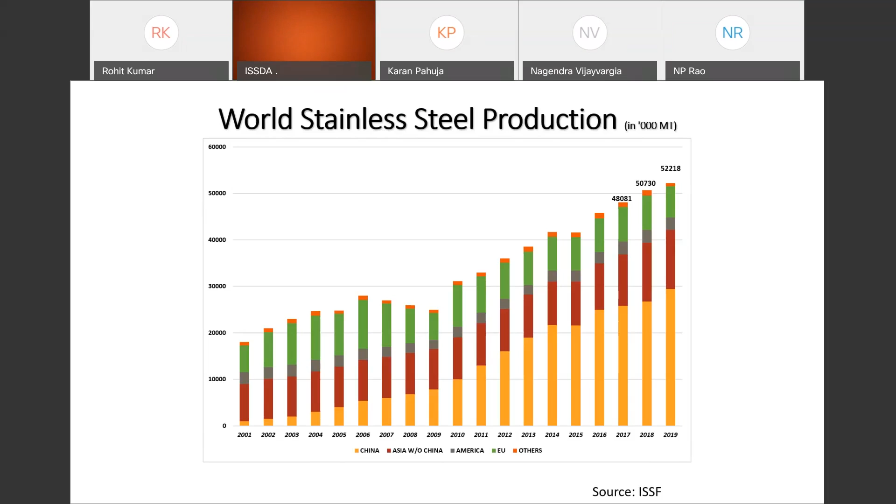Talking about India, yes, we are the second largest producer, touching almost 4 million tons last year. This year, obviously, there will be some downslide in the production of stainless steel, but that is natural because of the pandemic. Per capita consumption is an important indicator of the use of stainless steel in general. 10 years back, we were at 1.2 kg per capita consumption. We have been successful in increasing the per capita consumption.

When I say per capita, there are many sectors where stainless steel is used. Architecture and building construction is one, but in the process industry, like milk production, without stainless steel you cannot even imagine production of milk or any food item, because it is a hygienic, non-contaminating material. There are areas like automotive, railway and transport. All the coaches you see today with Indian Railways are made in stainless steel, a mix of grades. And there are many such areas where stainless steel is used.

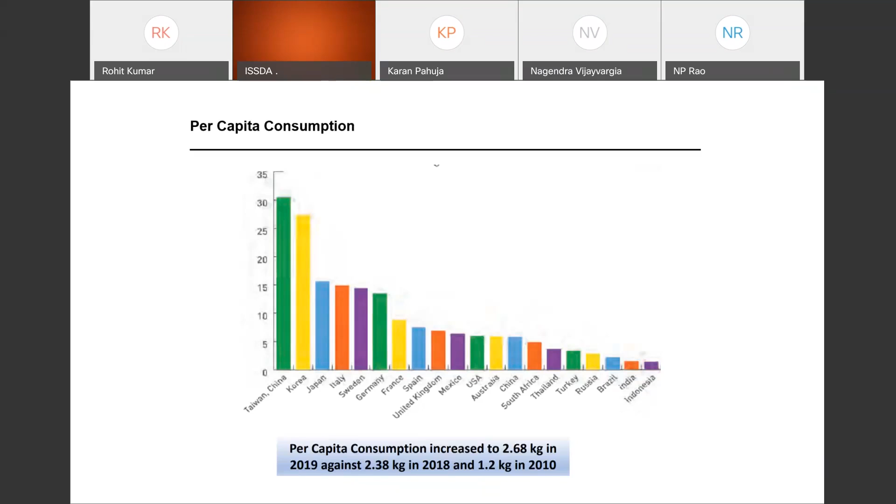But ABC has a large chunk of it, and it is increasing very fast, and today we are standing at a per capita consumption of 2.68 kg. But if you compare it with other countries where the use has been going on for the last 4 or 5 decades, we still have a lot of ground to catch up. And so these webinars are one of the ways we would like to spread the knowledge of stainless steel and why it is an important material for building and construction.

One of the most prime factors, before I come to the properties of stainless steel, is that it's a very green material. These days we are already struggling with environmental issues, and any effort to reduce the carbon footprint should be appreciated. Stainless steel is highly recyclable, and even after very long use, when it comes to recycling, it is recycled completely, and it helps in reducing the carbon footprint.

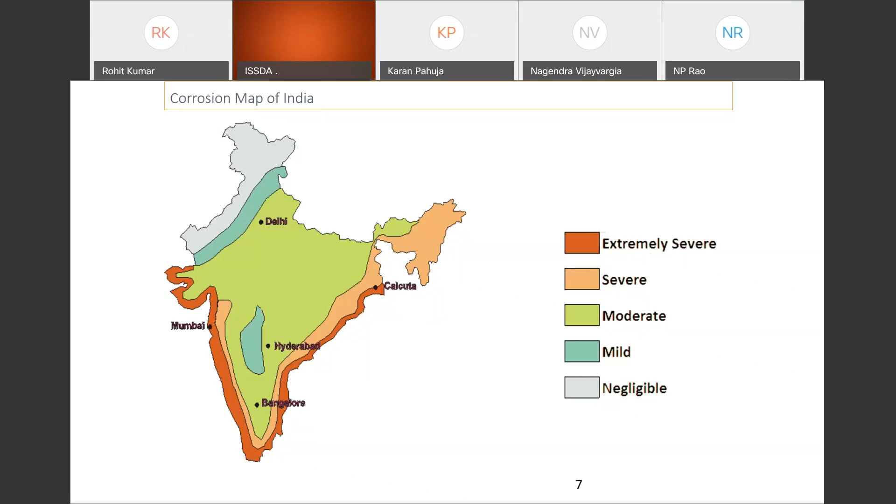Why do we use stainless steel in India? I'll come specifically to India now. In India, we have one of the largest coastlines, and along the coastline there are many cities. Mumbai is one of them. Bangalore also. Chennai is one of them. Kolkata, and there are inland cities like Delhi, Hyderabad, and such cities. There is corrosion due to the sea environment. There is corrosion due to heavy pollutants and pollution, and material degrades.

So what are the materials which are in use? Yes, wood is one of the materials used in building and construction, but wood cannot be used in all kinds of forms, and it is prone to insects, fungus, and degradation. Steel is one of the prominent materials used in construction, but again, steel gets corroded very fast. Concrete is sometimes used in combination with steel reinforcement bars, and there are issues of corrosion and degradation of concrete.

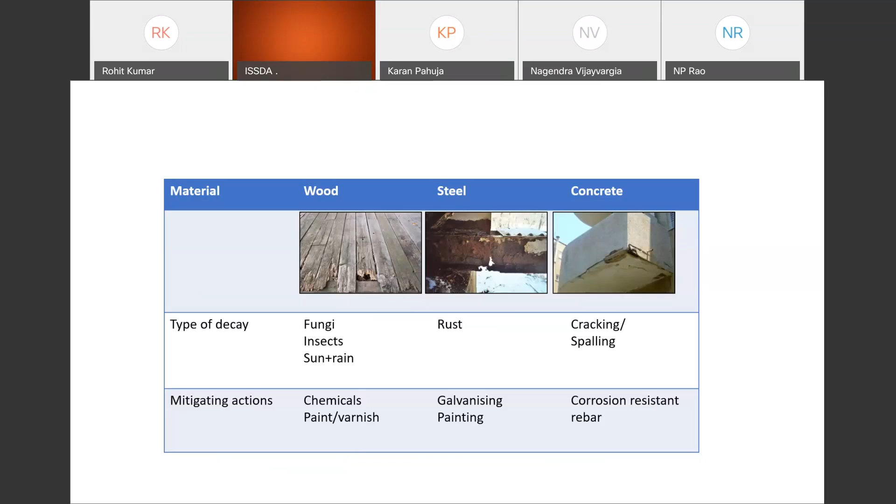These days, plastics are used, but under UV light, it becomes brittle and it also degrades. When I say it also corrodes, it doesn't mean just the corrosion of the top layer, but any degradation of the material is corrosion. So this also corrodes. Copper and aluminium are widely used.

Copper has this tendency to form a green patina over time. Aluminium also has issues of corrosion, as well as issues of strength, and all finishes are not available. Stainless steel, one of the prominent materials being used since its invention in 1913. And just after that, if you look at the small photograph, the Chrysler building, the first cladding of stainless steel in this building was done long back, and it is still shining and bright. So stainless steel has a prominent role in building and construction.

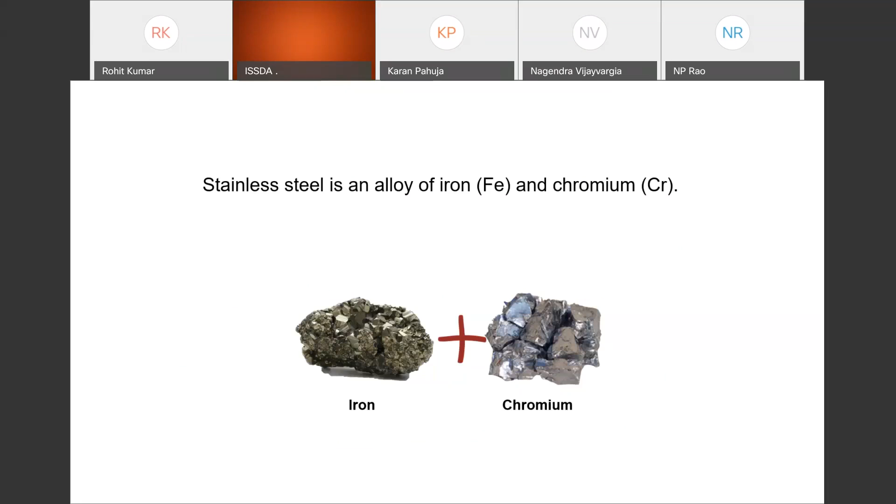But for some of the audience who are new to stainless steel, I'll quickly in 2-3 slides talk about what is stainless steel. Stainless steel is generally understood to be an alloy of chromium, nickel, molybdenum, and other materials. But to make basic stainless steel, you have to just add chromium into iron.

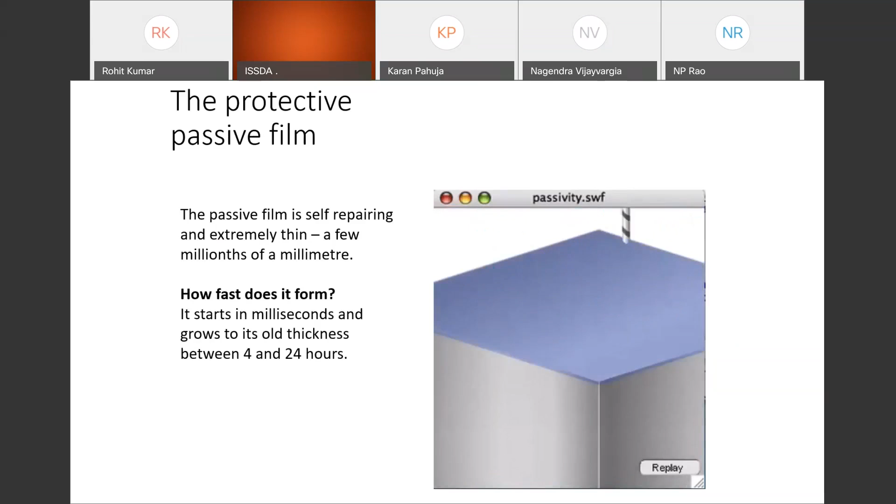So this is a very thin passive layer, and it keeps forming, and that is the reason stainless steel doesn't corrode easily. When we say stainless steel, please understand we are saying stainless, we are not saying stain free. There are many grades of stainless steel, and there are issues of selecting the right surface finish. We will take up all these matters today to understand why a good grade, good surface finish, and other properties of stainless steel should be selected carefully for a particular application.

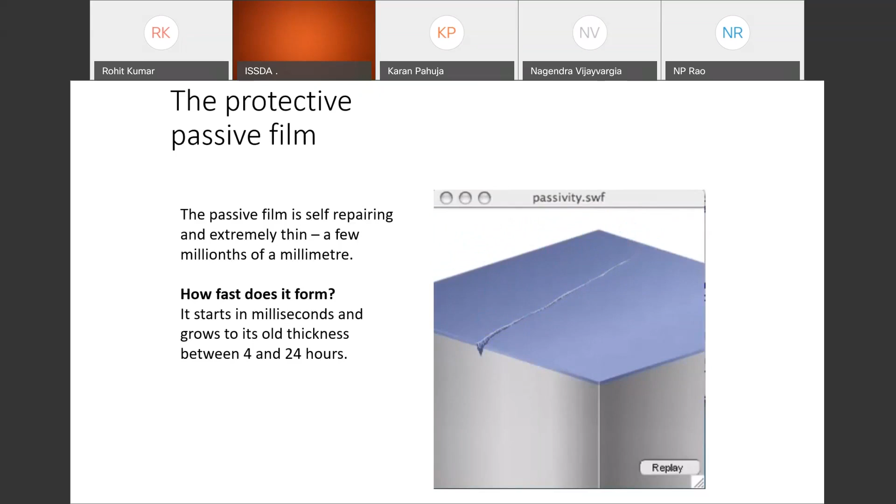So basically, stainless steel does not rust easily, and coming back to the alloying elements, chromium is the reason for stainless steel becoming stainless steel. Now, when you use a material, you should have the ability to bend it, cut it, and join it very easily. When I say joining, I mean welding. So to improve the ductility, toughness, and weldability, you add a certain amount of nickel into it.

Now, where the corrosion resistance requirement is high, where salts are present, and you need better pitting corrosion resistance, molybdenum is added into stainless steel. Nitrogen: with the advent of argon oxygen decarburization technology in the 90s, the ability to put nitrogen into the melt was introduced, which is an austenitic stainless steel stabilizer. It also improves pitting resistance a little bit, and definitely increases strength. So nitrogen bearing stainless steels were also introduced. So these are some of the major alloying elements.

Apart from that, other elements like titanium, niobium, and others which improve some of the welding or malleability properties are also added. But for architecture, building, and construction, we will restrict to the grades and families most widely used in building and construction. Now, you must have heard many names of stainless steel like 304, 202, 2205, 430, and all. To understand them, I have divided them into four basic categories.

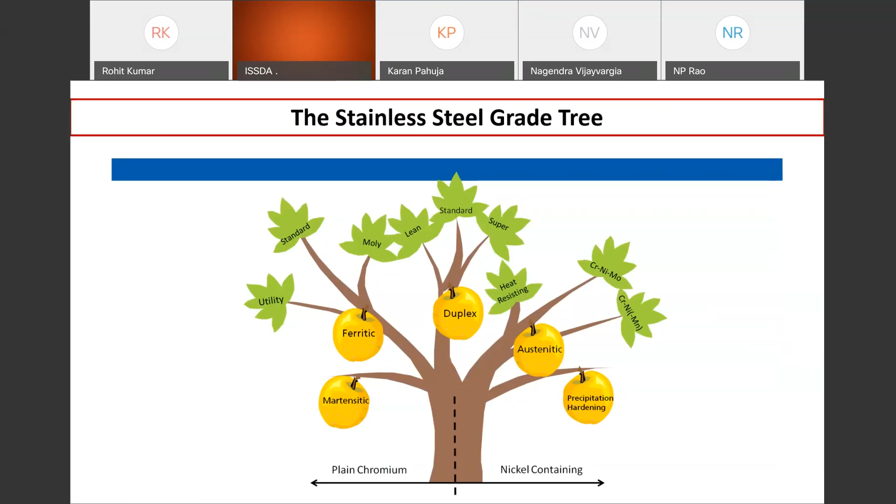Coming to the attributes of stainless steel, why do you want to use stainless steel? You are all aware that it has excellent corrosion resistance. But apart from corrosion resistance, in building and construction you need a very good strength material, where the strength to weight ratio should be very good. It should be easy to clean. It should be self-cleaning, as well as cleaning should be easy. Considering a handrail, where you touch it all the time, it should be hygienic also.

It should have good energy absorbing characteristics, good high temperature resistance, be recyclable, and it should be available in a wide range of finishes. I'll come to all these properties and try to link them with the application.

But apart from these properties, there are certain other requirements also, like the requirement of accidental blast, or in terms of architecture and building construction, tsunami, drought, landslide, high wind speed, tornado, hurricanes, even earthquake. These days we are encountering earthquakes every day in our Delhi capital region. Fire, a very important factor, maybe terrorism or some vandalism. So these unwanted factors also come into the picture while doing material selection.

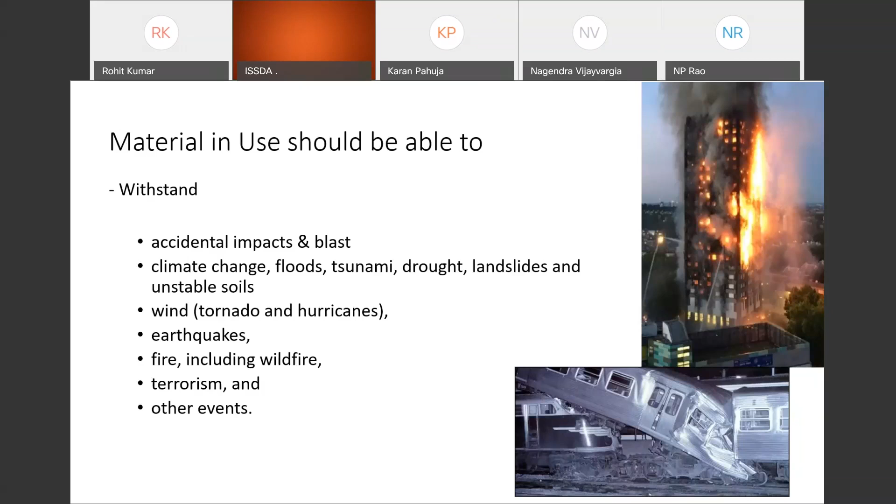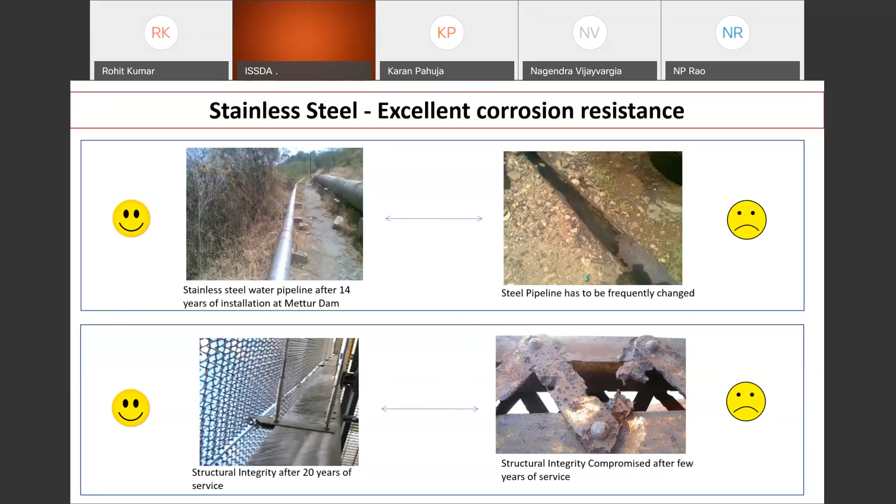There are high strength grades such as duplex 2101, 2205, 2304. So there is a range of grades available to select for a particular application. So it is important to understand the properties and application of the grades.

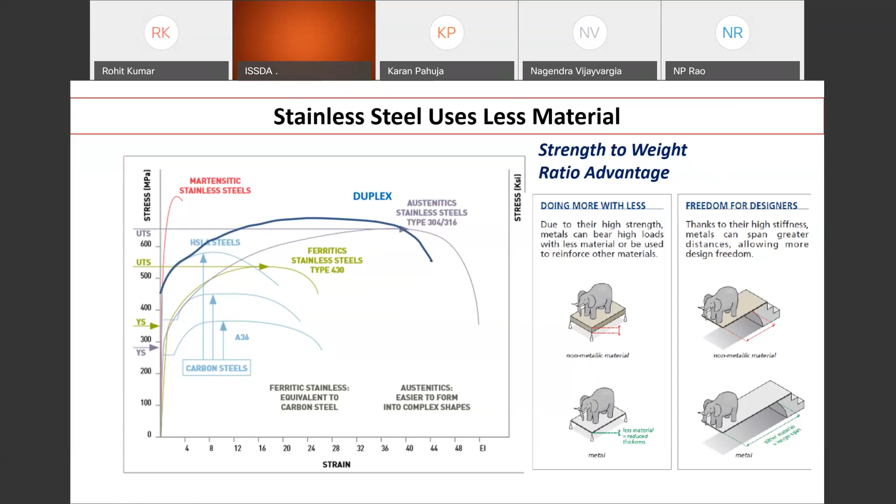Similarly for the cantilever beam. If you want to keep the same thickness, then if you have a high strength stainless steel compared to other material, you can have a longer platform. So the idea is that if you are going to use stainless steel as a high strength material, you will always be able to save material in design, as well as create more opportunities for the designer to work with.

Some of the examples, like this Parliament Building Library dome, which was very long back, was made in stainless steel structures. It takes less space, it looks good, it has good combination with wood, glass, or any other material. Similarly, not very late, the Afghanistan Parliament was done by the Indian government. CPWD was involved, and they used duplex stainless steel tubular sections for their central dome, not only for the lighter structure, but also if there is any vandalism or terrorism, it can withstand some of the loads.

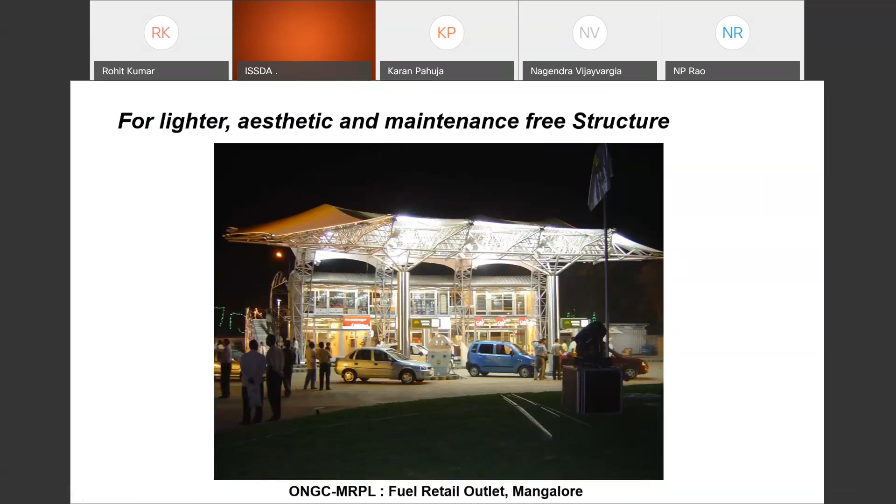So higher strength lighter structures are possible using stainless steel, good cantilevers, smart handrails, because you have high strength material. You don't need much of the load supporting elements, small load support, and it withstands the load. One petrol pump, this is again a very old picture, for lighter aesthetic and maintenance free structure. If you go with stainless steel, it gives you value. Though I'll come to the initial cost and life cycle cost of it later, because many of you must have this question in your mind whether it is very costly or not.

Now, another factor is impact strength. Earlier all the coaches used to be carbon steel ICF design, which was in a way not very good at having good impact strength. When you are using stainless steel, you had this ability to have a good impact strength. Now, I'm showing this picture because I want to take you to the next picture where this impact resistance property of stainless steel can be used.

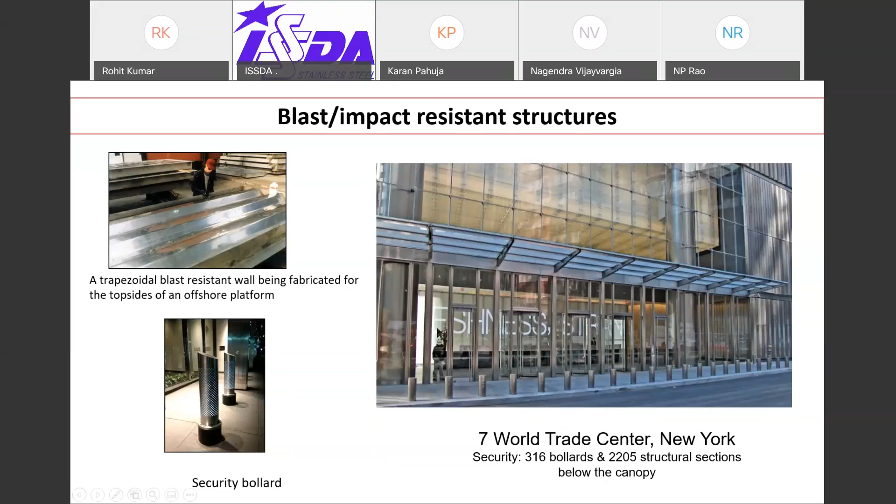So if you cold work and make some of the stainless steel in trapezoidal section, then it increases the impact strength. One very common example is bollards, used not only for aesthetic purpose, but so that they can withstand some of the hits they can get from vehicles or terrorism. This very beautiful example is from 7 World Trade Center. After 9/11, some of the buildings had to be protected from terrorism. So they chose stainless steel because it is very high strength, and the look of the building is still maintained. Instead of using a very thick section of other material, stainless steel is used to get it done.

So we have been telling the airport authority that all over the world, most of the airports which are prone to hurricanes and tornadoes are built in stainless steel, because stainless steel does not corrode. Not only the wind pressure on sheets, but at the joints where it is connected with the steel bolts, corrosion happens and it gets loosened up, and results in some kind of tearing and breaking. So stainless steel roofs are popular. So we should also be realizing the importance of it and start using it.

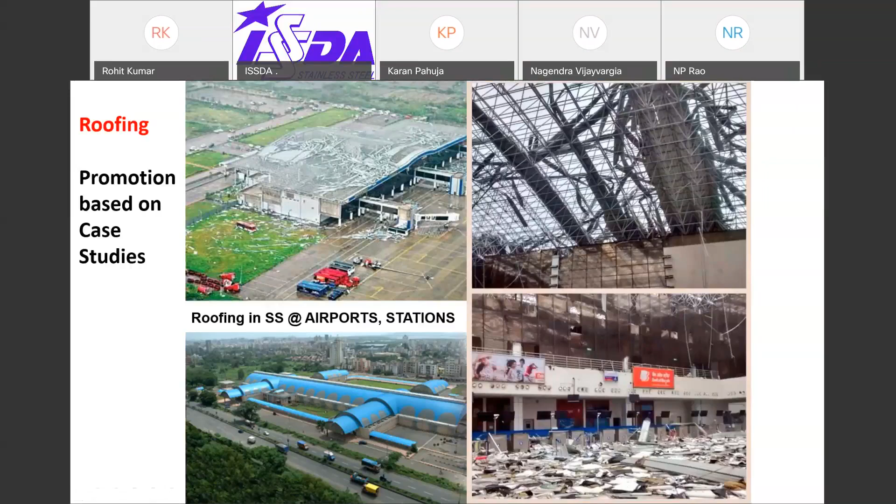What this property suggests is that in case of fire, if structural stainless steel is used, you will have more time to evacuate the building. Like say for the World Trade Tower collapse, if it would have been stainless steel, you would have much more time before the structure loses its strength and collapses.

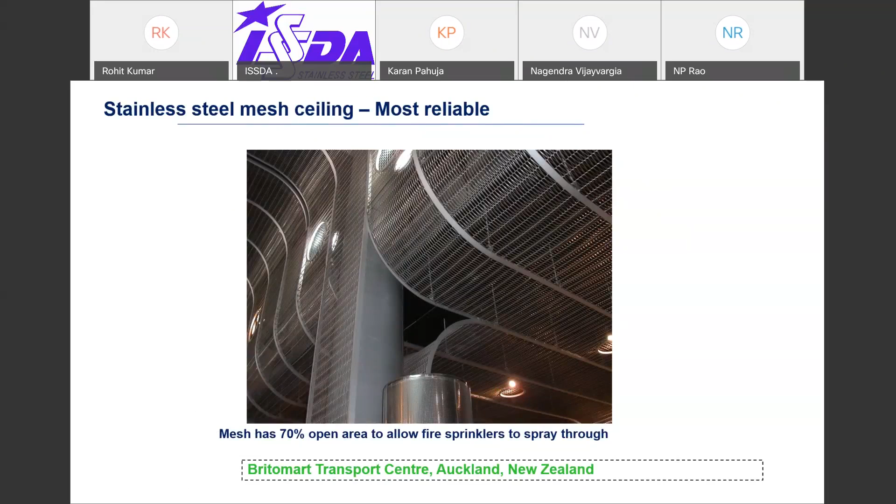So these properties are very important when considering stainless steel, not only here but also for the paneling of the building. When you do building facades, I'll come to that point also, these fire properties also help. Similarly, there are wire meshes available for mesh ceiling on the top. Earlier it used to be asbestos, which is now banned. Now there are materials which are supposed to be fire retardant, but unfortunately not all materials are fire retardant. So stainless steel used for mesh application is one of the ideas I would like to throw in front of you for building and construction.

This question must have come to your mind also, that if you use a stainless steel roof, it will heat more and accumulate more heat beneath the roof. No, it is not the case. There is something called solar reflective index, and stainless steel is more efficient in reflecting solar energy than typical roofing cladding material if the surface finish is selected in a certain way. Stainless steel with a certain surface finish will reflect more compared to white paint and asphalt. This is an experimented, documented fact. With a proper selection of stainless steel, you will have a cooler roof.

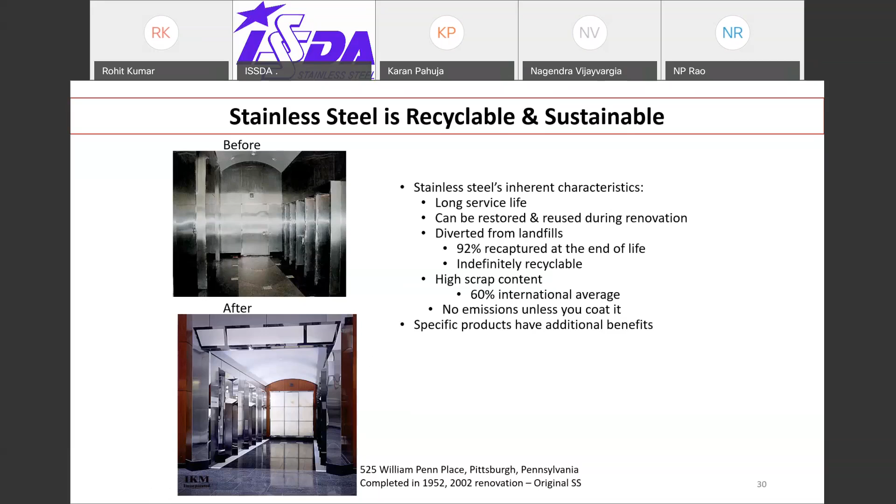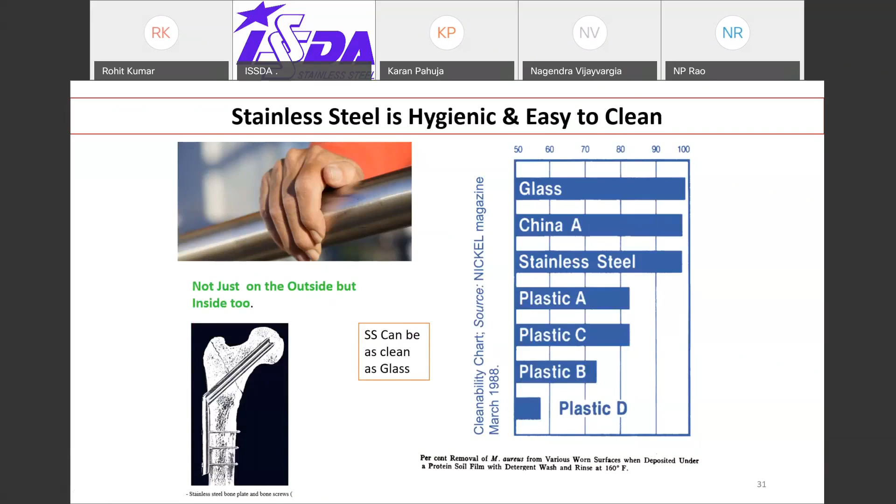It's hygienic and easy to clean. Stainless steel, if properly finished and used, is as good as glass and china, and it is certainly better than plastics. So where hygiene is required, it is the material to choose.

Now, is stainless steel costly? Cost depends on the cost of corrosion, which you are incurring every day, and the cost of maintenance you are again incurring every day. So not just the initial cost of the material is important. What is more important is whether you are going to lose the material in a certain period of time, and then to maintain that material you incur a lot of cost. From there, the concept of life cycle costing comes. But let us understand the cost of corrosion quickly.

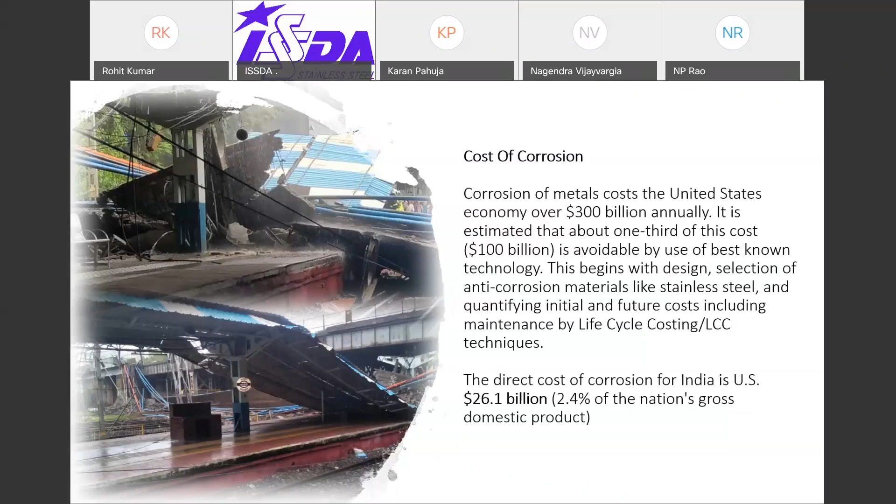In the United States economy, over 300 billion is annually lost because of corrosion, and about one third of this cost is avoidable if we use better technology and better material. This begins with the selection of anti-corrosion material like stainless steel, and quantifying the life cycle costing in the project stage itself, because if you estimate the life cycle costing in the beginning, you will be able to choose the better material. The direct cost of corrosion in India is also 2.4% of the GDP, which is huge. The picture on the left hand side is of the Andheri station in Mumbai, which has fallen due to corrosion over a long period of time.

Now, just one example I'd like to give you: the Golden Gate Bridge, made in 1937. Yes, you will say that it has lasted for more than 60 years, 70 years, but please understand that you have a whole department to maintain this bridge, which is 13 iron workers, 3 pusher ironworkers, 28 painters, 5 paint laborers, and a chief bridge painter just to maintain it. They start from one end, reach the other end, and the corrosion starts happening at the other end. So they keep on painting and incurring cost on this bridge even today.

So take a similar bridge, like, say, I missed putting the photograph, there is a Stonecutters Bridge which has been made in stainless steel. No maintenance is required. Life is more than 100 years. Duplex stainless steel is used. So life cycle costing is important.

Now you will ask me how we should attempt to calculate the life cycle costing in your projects. It is not very difficult. There are tools available to do the life cycle costing, but I'll suggest you go to the Indian standard. There are two Indian standards mentioned here which give a guideline for life cycle costing analysis. So if you are doing a government project, this standard helps you to calculate life cycle costing. You can contact ISSDA. The contact will be given in the end.

ISSDA can also be contacted for life cycle calculators available with us, and we will help you to calculate the life cycle costing. There are several other international standards available for life cycle costing analysis: ASTM, New Zealand, ISO, NS. So you can use these standards also. So it is easy to calculate. The only thing is you have to keep data ready for estimation of what would be the maintenance cost or other cost associated with the project.

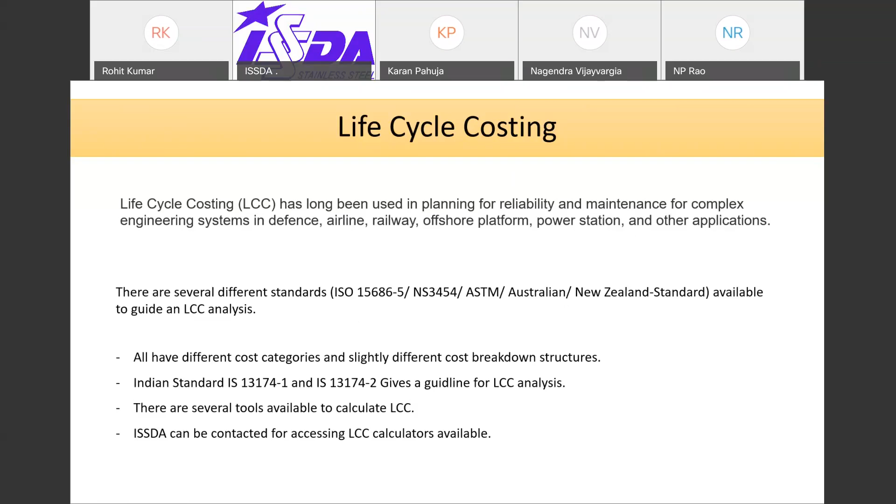So what I'm trying to say is that you must do the life cycle costing analysis of a project, and you will find that stainless steel becomes cheaper over a period of just 20 to 25 years for many projects. Maybe I'll give one example later.

How does stainless steel help in doing it? These days the concept of screens over a building is getting prominence, because buildings mostly made of glass result in higher use of air conditioners in warmer countries, or heating in colder countries. Considering India, which is mostly a warm country, in summers there is a huge issue of heat, as well as in winters right now. So you use these sunscreens to reduce the energy need.

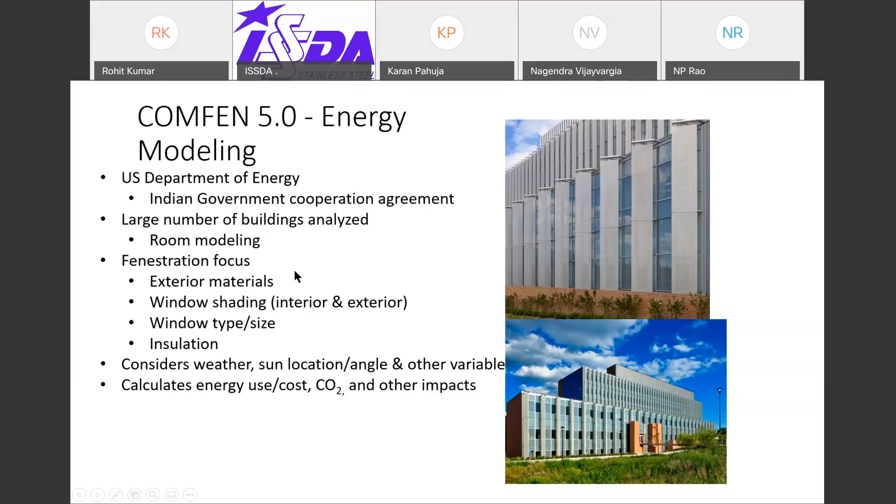There is a software called COMFEN 5.0. You can Google it. It is available free of cost, and you can go and model some of these sunscreens to see in your building design if certain kinds of sunscreens will save energy or not, where you can choose stainless steel. Now these stainless steel panels can be of many types. They can be fixed type on a fixed frame. They can be movable, where, according to the direction of the sun, you can move them.

And if you look at these three figures, unshaded wall 34 degrees, shaded wall 27 degrees. So there is an immediate reduction in the front wall itself, and inside there is more reduction, 20 to 25% energy saving because of the sunscreens.

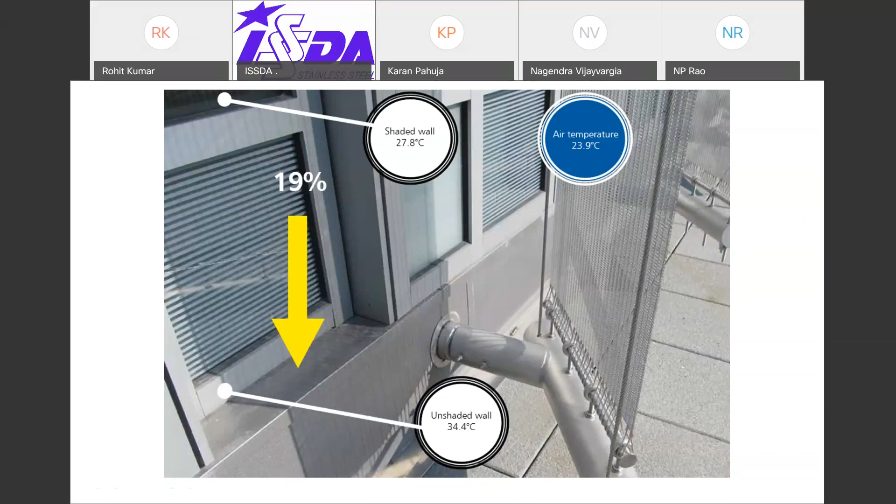To give an example, in India, in Kolkata, we have this building called Galleria 67, where these movable panels have been fixed, and these are colored panels. In our later presentations, you will be taken through some of the finishes of stainless steels and why it is important to choose the right grade, right finish, so that there is no issue. So these panels help in doing it.

We have one mesh facade in Yamuna Sports Complex from when the Commonwealth Games happened. Some of the sunscreens are used for planting also. So if you are doing some planting, you need to have ropes and wires in front of it for plants to grow. And in steel, you can understand it will easily corrode and these plants will fall.

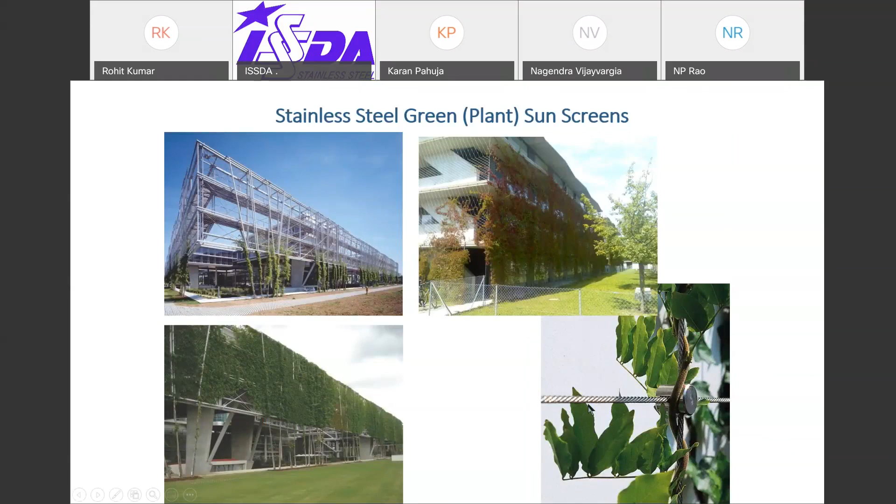Some of the other areas I'll quickly touch upon because I'm already reaching my time, and in fact I'll exceed my time if I do not conclude quickly.

Plumbing is one of the fast rising applications of stainless steel. Plastics, no doubt, because of the very competitive cost, have gone into buildings, but please understand that in a building you invest a lot of money in your kitchens and bathrooms, and put costly tiles and costly material in your toilets, and if seepage occurs because of leaking from the joints, the whole area gets disturbed, and you have to tear it up and do the repair work. It incurs a lot of cost, and the cost you have invested goes to waste because of the little investment you did not make in plumbing.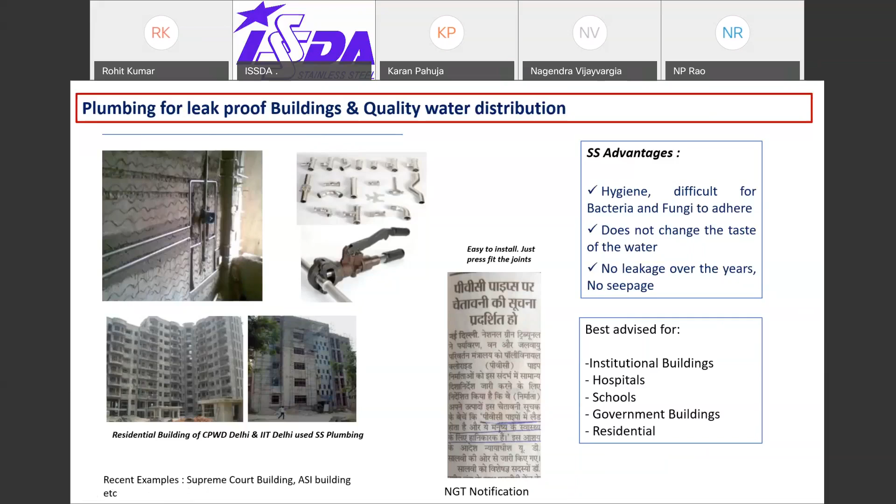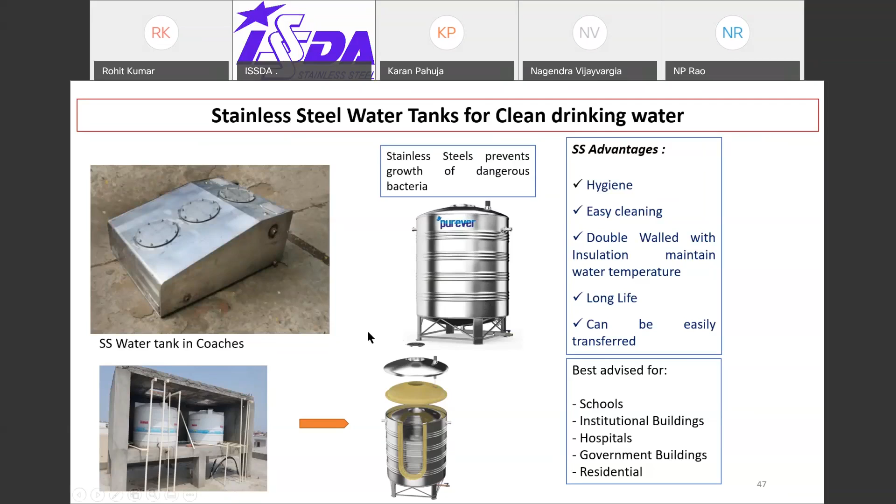Water tanks are becoming very popular. Plastic water tanks are very dangerous because some of the chemicals will leach into the water when the sun falls on it. It has been reported that some of these are prone to cancer, and stainless steel water tanks are available these days in large numbers, not only double wall and single wall, but also some modified tanks for your lofts, for your balconies, for your particular use. They can be modified to any shape and size, and they are available. Further information can also be provided on it.

Some of the infrastructure, like say if you are involved in making a park: plastics decay over time, and generally break. Steel nobody uses because it is prone to corrosion and septic. So stainless steel is predominantly being used in parks and areas which are safe for the environment and kids. Please think about it.

A lot of sculptures are being made in stainless steel for the beautification of the city, and stainless steel is the most preferred material for it. This charkha is made in stainless steel, which is at Connaught Place, Delhi. Sprout, near AIIMS, which you all have seen. This tree made in stainless steel is near India Gate. And in many parts of the country, such sculptures are coming up.

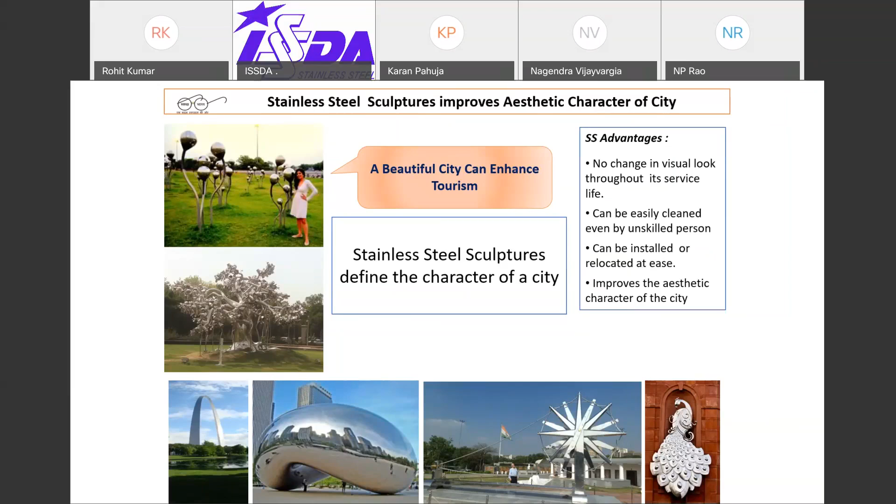So if you are an architect involved in some such projects, you have stainless steel available. Now it is available in many colors also. So you have great choice with stainless steel, which can withstand all kinds of environments for a long time.

Now coming to signages, bus stops, and hoardings, stainless steel is a preferred choice of material these days, because Delhi is a proven case for bus stands as well as signages, where the use first started, and now all over the country, even in the remotest places in Assam, and in 2 to 3 tier cities like Patna, they have 80 bus stands in stainless steel.

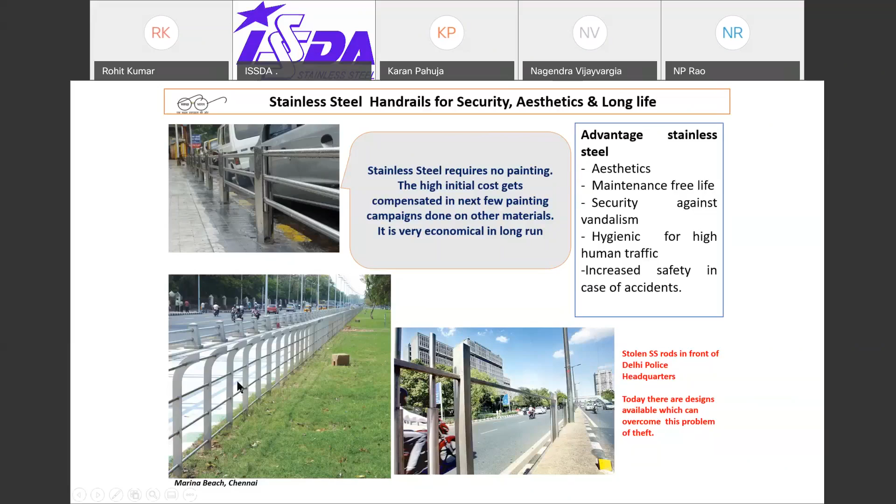So stainless steel has proven to be a great use for public utility items. Handrails: obviously, many would think, why put stainless steel railings in a public place near roads? See, this is in Mumbai, this is in Chennai, near the sea, Marina Beach, 2, 3, 4 kilometers of stainless steel rails. Delhi. So see, these are prone to vandalism as well as corrosion, and people have a habit of making them dirty, posting posters, spitting on them. So stainless steel has some properties of self cleaning as well as being easy to clean. So this helps in cleaning, and also improves the aesthetic of the building.

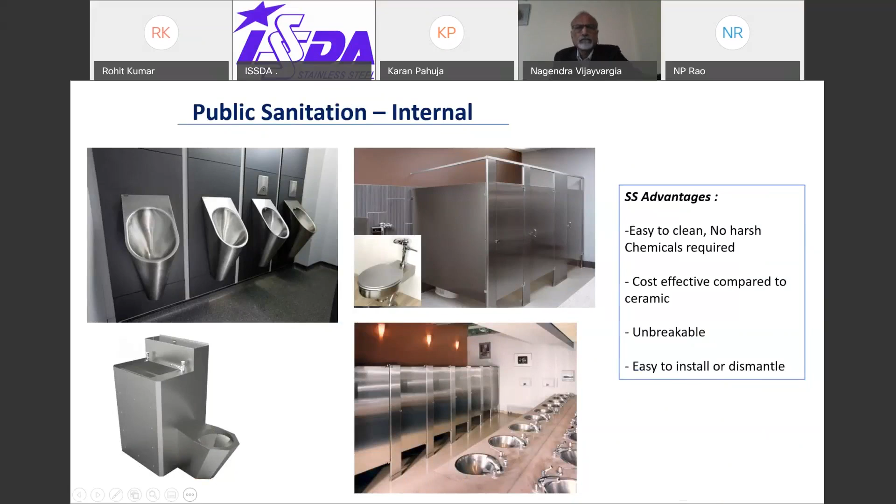Public sanitation: these partitions are getting popular these days because they are very strong, vandalism proof, and look beautiful in areas where you have to segregate. Urinals and wash basins are also available in stainless steel. There are many other examples, but due to the paucity of time, I would restrict my presentation up to this only.

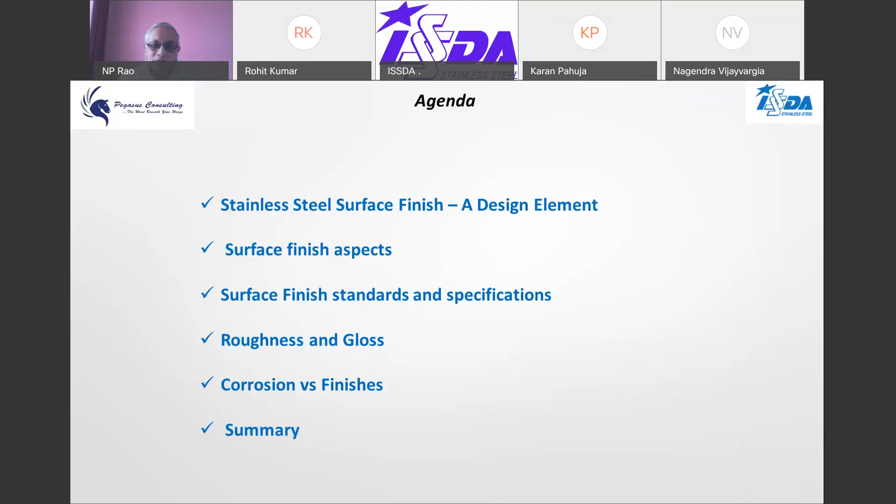The stainless steel surface finish is a very important design aspect in the selection of material for the building industry. It is important to provide good aesthetics and appearance, and especially in architectural applications, the visibility and aesthetics make a lot of difference. Stainless steel has a wide variety of special surface finishes, which no other material can match. And surface finish is a very, very important aspect of the specification, and it has to be suitable for the end use. So the selection of surface finish of stainless steel is very important relating to the end application of stainless steel.

And in some of the non-decorative applications also, stainless steel surface finish is important in terms of implications for friction, maintenance, or corrosion resistance. So the stainless steel surface finish must be identified by a standard industry designation or by a specific trade name. And the choice of stainless steel surface finish should not be left to the supplier, or the specification should not be loosely worded, but it should be very specific, just as it is for a grade.

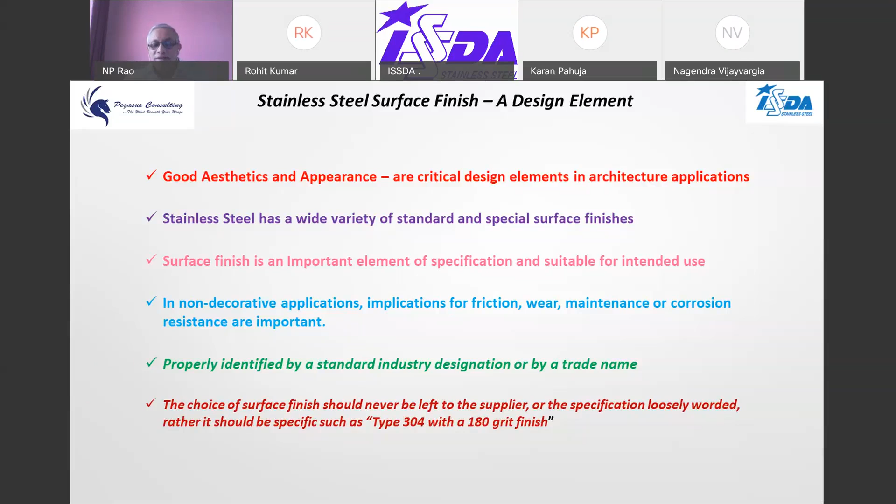For example, a 304 grade with a 180 grit finish. These things make a lot of difference in terms of selection of the right surface finish for the stainless steel application.

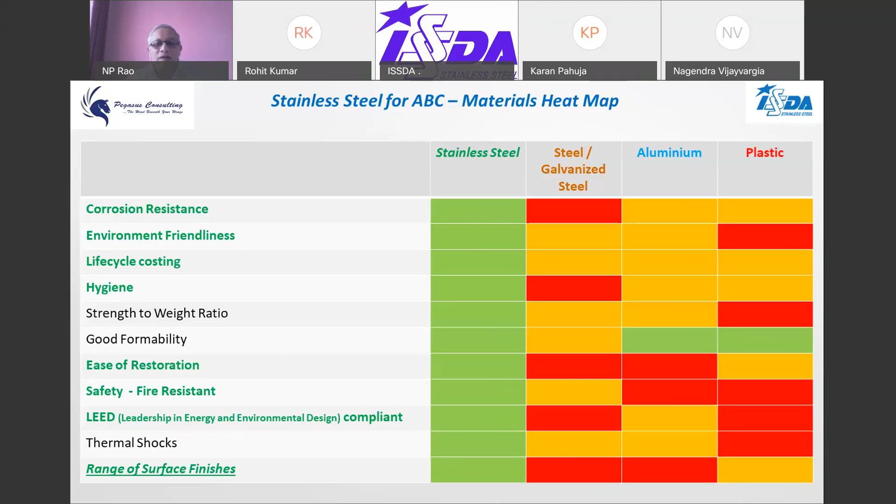Common stainless steel surface finishes. So we have various types of surface finishes which are produced in various process stages. So you have the hot rolled stainless steel mill finishes. The first one being the hot rolled stainless steel black, which is as rolled. Then you have the hot rolled annealed and pickled stainless steel, which is called the number one finish, which is hot rolled and pickled after rolling. Then you have the cold rolled mill finishes. This is the cold rolled hard, which has got a high hardness, 2D, 2B, BA, and dull finish.

You have the mechanically polished finishes, number 3, number 4, hairline, number 8, and so on. And there are some more of these. Then you have the special rolled finishes, embossed, single sided and double sided. There are other special finishes as well: acid etched, PVD coated, bead blasted. Then you have the anti-fingerprint coating. Then you have the latest in stainless steel finishes, the 3D printed finishes, and you have the electropolished finish.

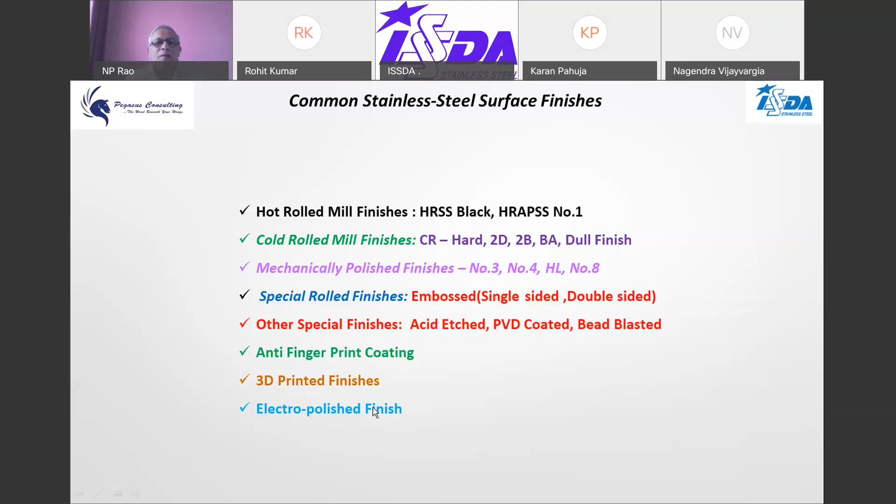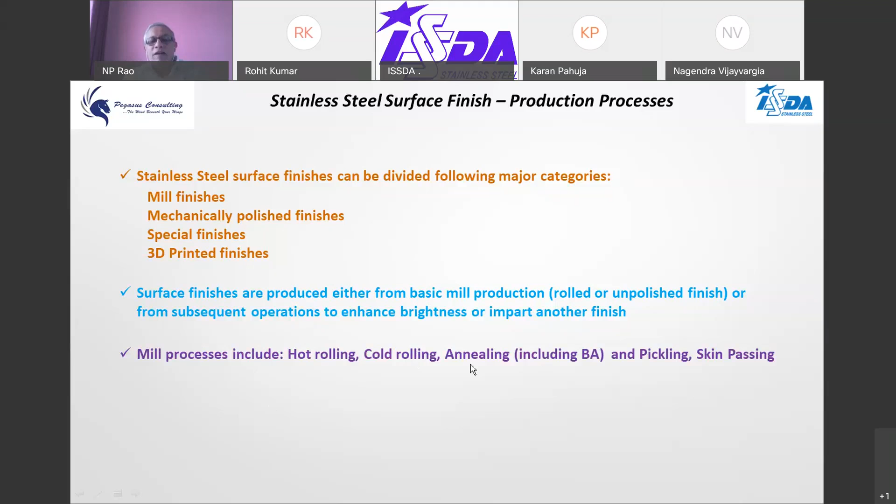Coming to the processes, how these finishes are made. It can be divided into a few major categories: mill finishes, mechanically polished finishes, special finishes, 3D printed finishes. And surface finishes are produced either from basic mill production, as we saw in the previous slide, that can be rolled or unpolished, or from subsequent operations to enhance the brightness or impart another finish. Now, mill processes could include hot rolling, cold rolling, annealing, including bright annealing, pickling, and skin passing.

And mechanical polishing could include grinding, polishing, including electropolishing, and buffing, etc. Then you have the special finish processes, including embossing, acid etching, PVD coating, bead blasting, 3D printing, and anti-fingerprinting. So these are just the various processes. In the previous slide, we saw the types of finishes.

Now, this slide we have shown to compare the standards which are available across common standards in the world. So we have compared the ASTM, which is the American Society for Testing and Materials, the Bureau of Indian Standards, and the European standards. These standards are for the finishes alone, and we have compared them because a lot of these materials are available from various standards, and often the mills supply their test certificates in their own country standard.

So it is important to know what is comparable, because in India we have to use BIS for all specifications of stainless steel. So for example, the hot rolled number 1 finish in BIS and ASTM is called number 1, whereas in the EN finish it is called 1D.

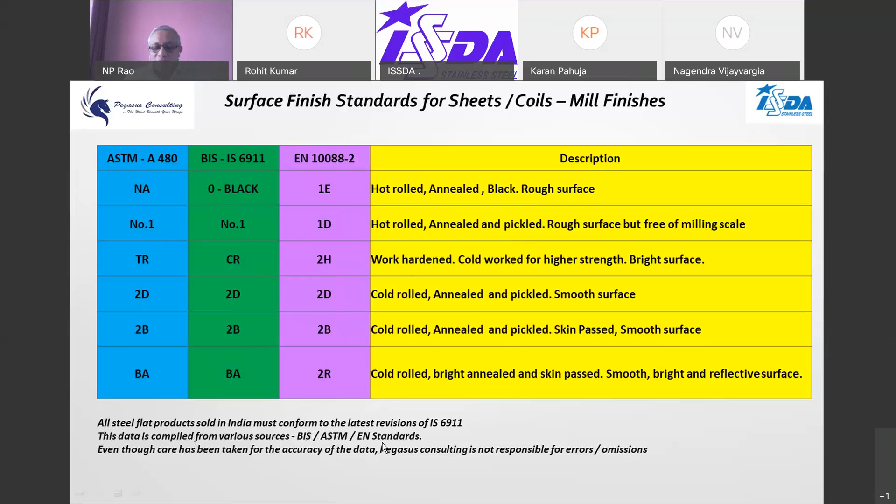Most common finishes which are seen all around us are probably the number 4, 2B, and the BA finish. And even in the building construction industry, as you enter a tall multi-story building, especially an office building, you'll probably see the number 4 finish outside of an elevator door, on the switch panels, inside the elevator, on the columns, on the walls, and many other places of common area like water coolers, etc.

Now this is something unmatched by any other material. The stainless steel number 8 super mirror finish has high gloss, practically a gloss of 99%, the true mirror. And this can actually give you a feeling of a lot of space, reflectivity and elegance, and it gives you a high aesthetic appearance. And once again, it is used for various applications in column cladding, building cladding, and a lot of other applications, as you can see. The reflection is very high, and it is just majestic, probably unmatched.

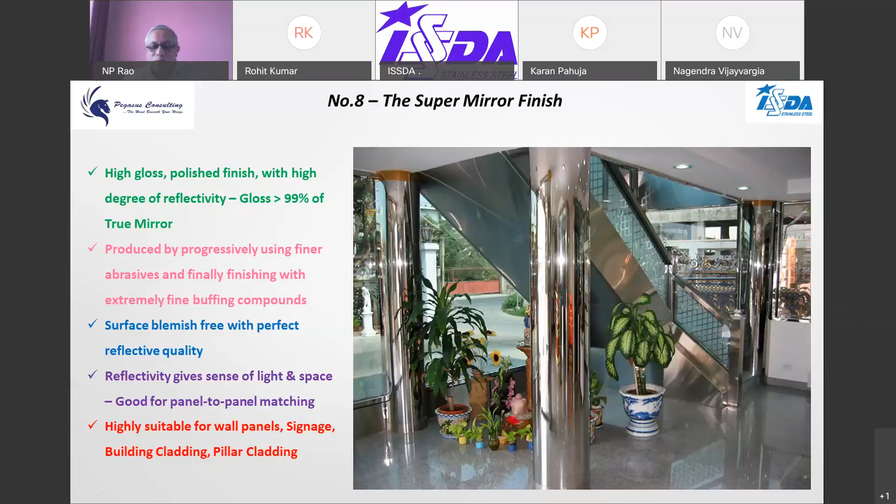So it is very important if you're going for an architectural application, be it column cladding, wall cladding, any other paneling work, or a facade, to select the entire lot of material from the same lot of raw material or from the same source, so that there is no difference in the finish. Otherwise, it can make a difference in terms of the tinge, etc.

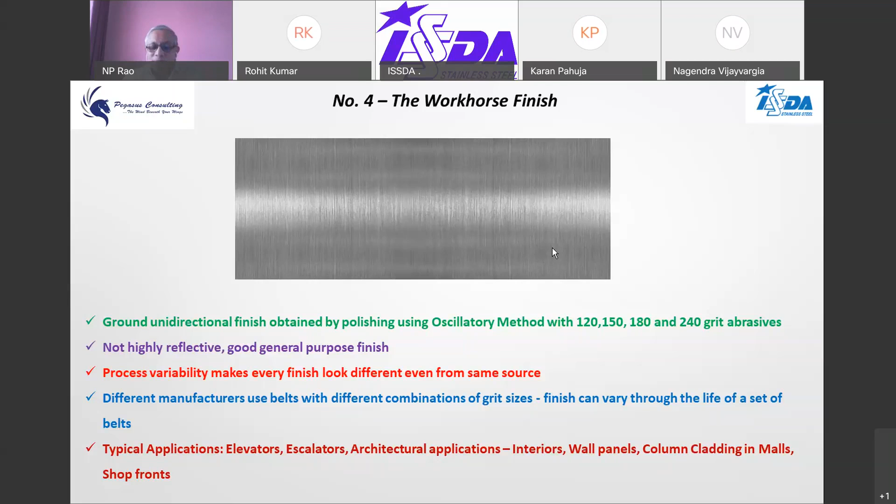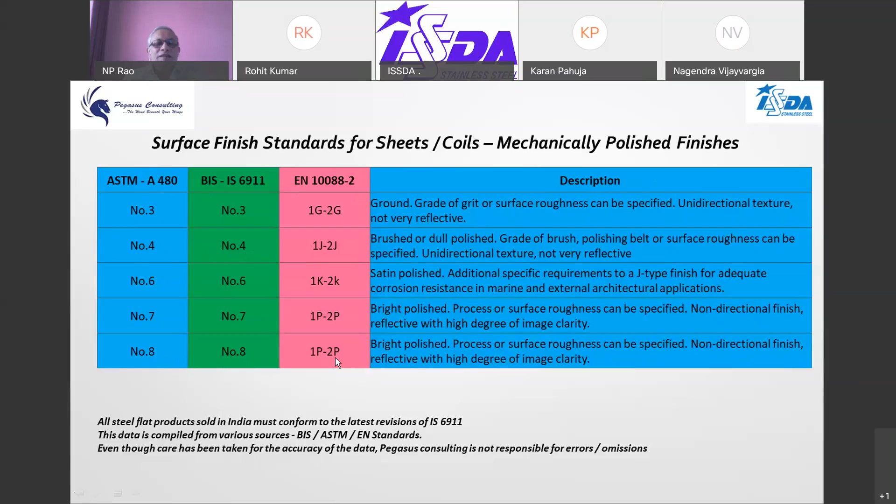Coming to the surface finish standards for some of the mechanically polished finishes. Once again, we have compared the three standards here. For example, if you compare the number 4 finish, the ASTM and the BIS both classify it as number 4 finish, whereas under EN it is classified as 1J or 2J. Coming to number 8 finish, which is the mirror finish as we saw, ASTM and BIS designate it as number 8, whereas EN designates it as 1P or 2P.

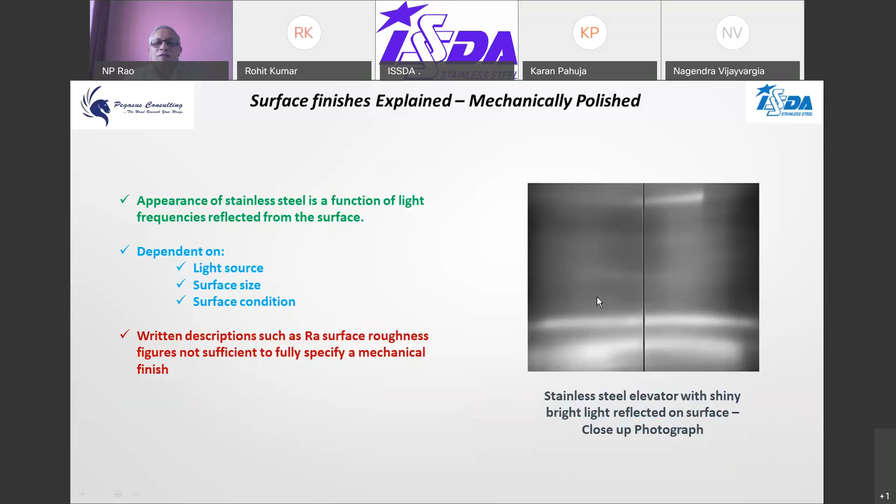There is also another aspect of choosing a mechanically polished finish, which is a parameter of reflection of light. So an elevator door actually could appear like this when you have a look from the front. So when the light is put, you look at the difference in the finish. So when choosing and inspecting in the polishing line, it is important to run the light and see, so that the finish is more uniformly seen when actually installed at site.

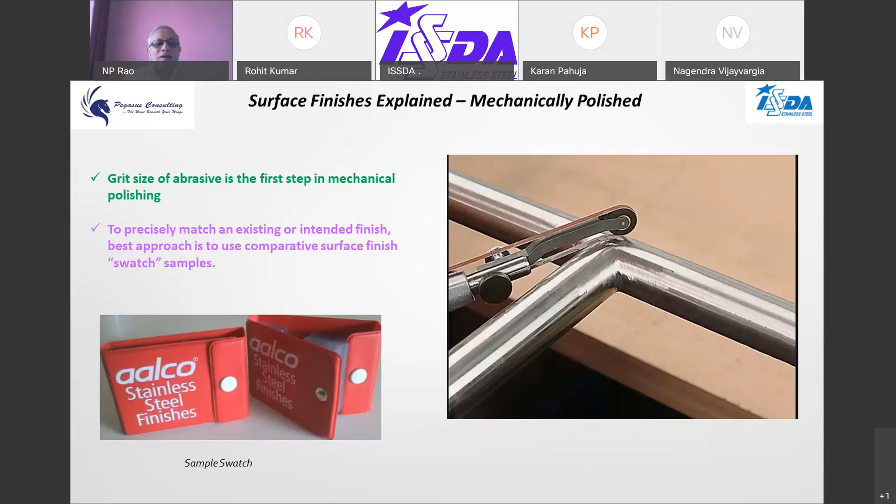Now, what are swatch samples? These samples are required so that when a producer produces the samples, or if you are the end user, you keep the samples as templates to match with the final supplies, because the mechanically polished finishes can vary. Once again, as we've been talking, it is important to keep this to compare and use the same material repeatedly if it is for the same application.

We talked about some of the special finishes in the previous slides. Now, the very interesting part is the special finishes do not have any mention in the ASTM or BIS, whereas in the EN standards, there are lots of finishes which are specified in the standard. For example, the 2F finish. This is not specified in ASTM or BIS, whereas in EN, it is cold rolled, annealed, skin passed.

Some of the special surface finishes shown here are embossed, single side, double side. These all can be produced on either side of the material, single side or both sides. Then you have the PVD coated color finishes, which can be produced on a mirror, on number 4, or on any base finish. Then you have the acid etch finish. Once again, acid etching can be done with any kind of pattern, and it can be a color finish or a stainless steel finish.

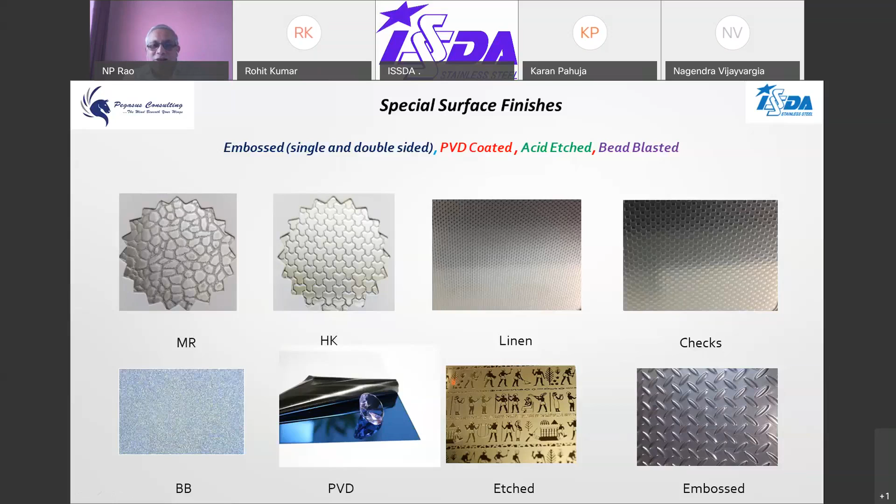You have the bead blasted finish here, which also looks very matte, and it's a very good finish. It gives an impression that it is not reflective, so it can be used in a lot of applications where you have a lot of human touch. Then you have the embossed finish, which is also very good in terms of vandal proofing and scratch resistance. Of course, we have only shown these many here, but there are hundreds of such finishes available all across the world.

Now this building here uses this finish, which is a satin non-reflective dull finish. And you can see the building, Khalsa Heritage Center, picture taken in daylight of these domes. And this is the nighttime picture. And you can see the stainless steel finish on top of this roof.

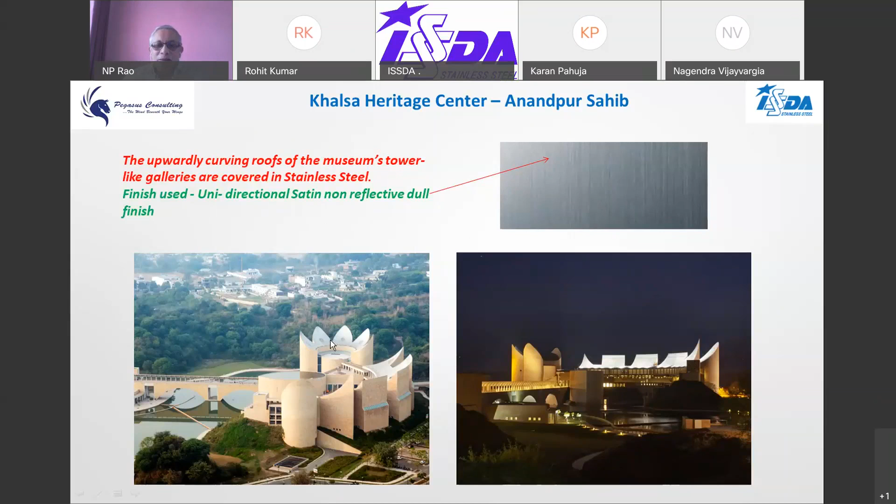Talking about LEED, which is the Leadership in Energy and Environmental Design certification. In India, the Ashok Leyland building in Chennai was the first office building and 4th in the world to bag the certification many years ago. And the panels used here are stainless steel panels, and they are non-directional, non-reflective satin dull finish.

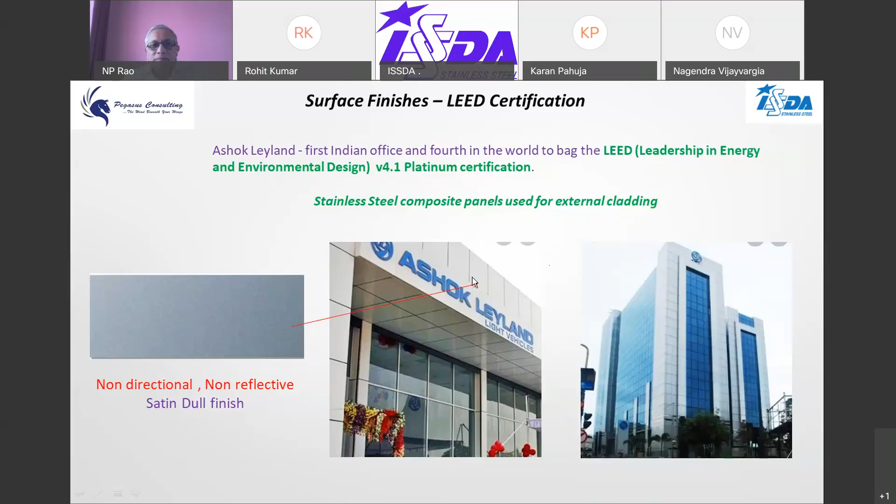This is a very new development. In Rohit's slide, we saw one of the wire meshes being shown as a fence and also for plant applications. So this is a wire rope, stainless steel wire rope, and the new application is color coating or PVD coating of stainless steel wire rope. This technology is yet to come in India, but there's a lot of application being used, and I think one of the airports in India is going to use this.

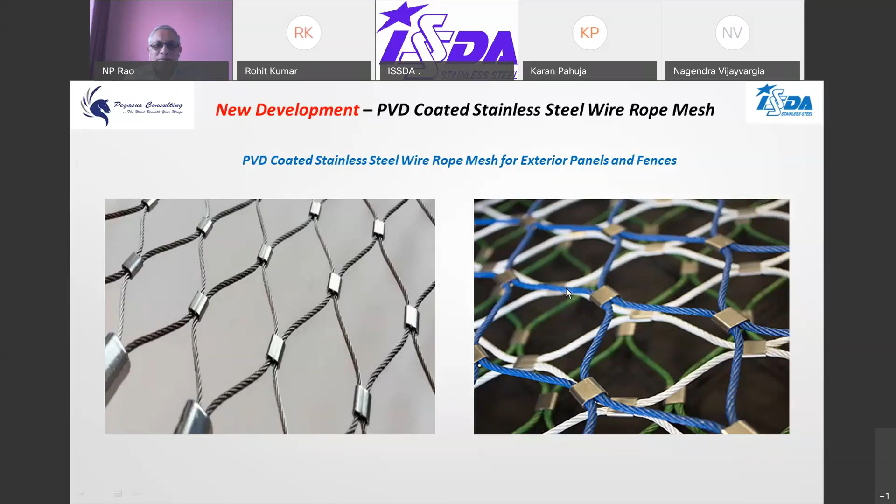Now, Rohit talked about hygiene, and we are talking here about all the finger touch sweat. And in the last 9 months, everybody's talking about cleaning, sanitizing, and whatnot. Now, by using the anti-fingerprint coating, you can prevent stains because of sweat or because of dirt or fingerprint, and it's easy to clean. And I think this is very, very important to use, especially in public touch areas like elevators and reception desks and other places.

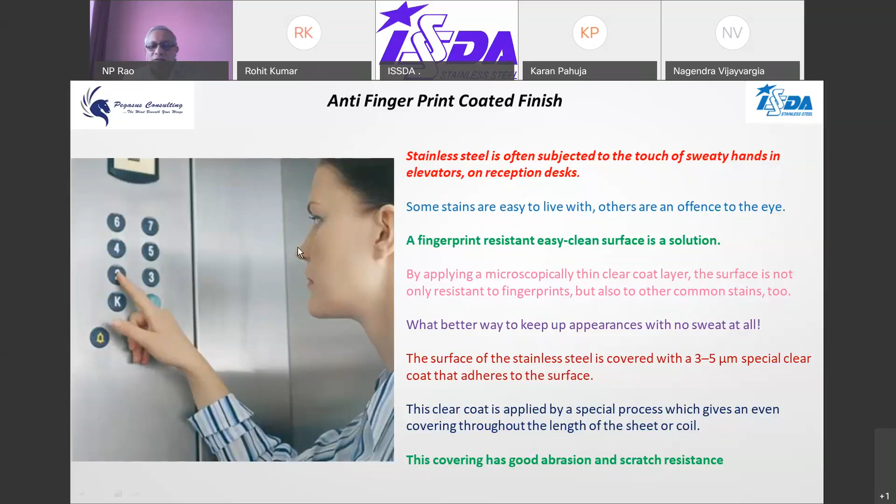Electropolishing. Electropolishing is an electrolytic process. As compared to mechanical polishing, electropolishing also can give you a very smooth, shiny, mirror-like surface. The advantage is that at the surface of the material, the passive layer is not much damaged in electropolishing, whereas in mechanical polishing, it is likely that the surface is slightly eroded. And the structure of the surface remains almost the same in electropolishing.

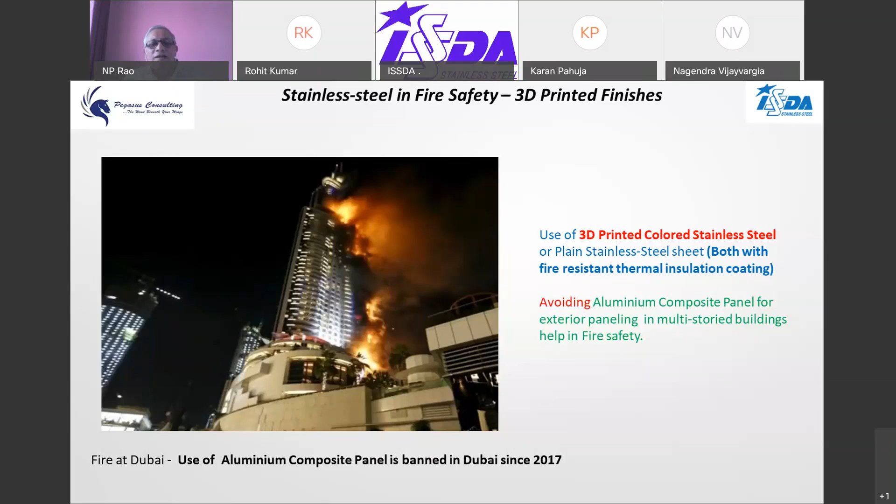So 3D printed technology is gaining ground in India, and I know there are a lot of 3D printing companies in India who are actually printing metal, and I attended some of the webinars. It's really interesting technology, and I think it should be made use of because you can get n number of choices.

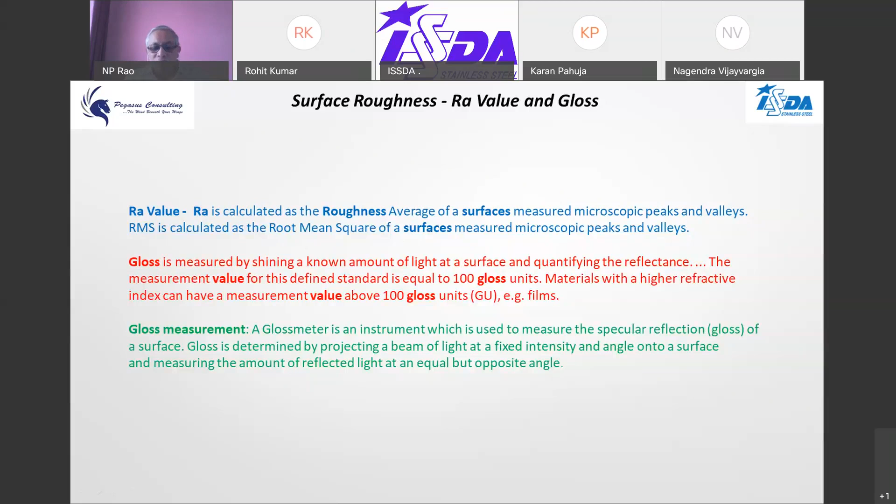Laser technology for rust removal. Now, this is a new technology which is easy. There are lots of other conventional cleaning methods using chemicals, etc., which result in hazardous vapors, especially when humans are involved in cleaning buildings. So if you use laser, which is a non-hazardous and non-abrasive cleaning method, you've got a lot of laser applications, very handy. It has a better reach and it can be used easily to clean such areas and also do the rust removal.

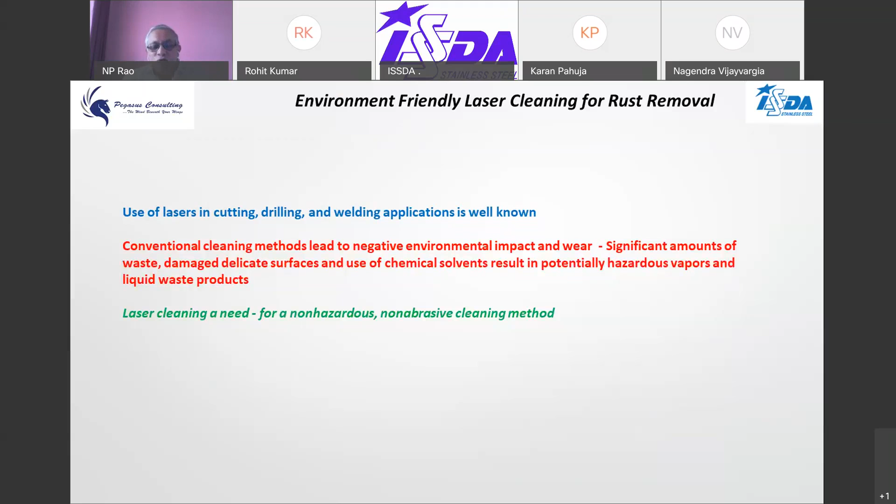Summarizing, surface finish is a very, very important element in any specification of stainless steel, especially in the building construction industry. And once again, the choice of finish should never be left to the supplier, or the specification should not be loosely worded. It should be very, very specific. Please consult ISSDA, Pegasus Consulting, and your stainless steel manufacturer before choosing a stainless steel finish, which is so important.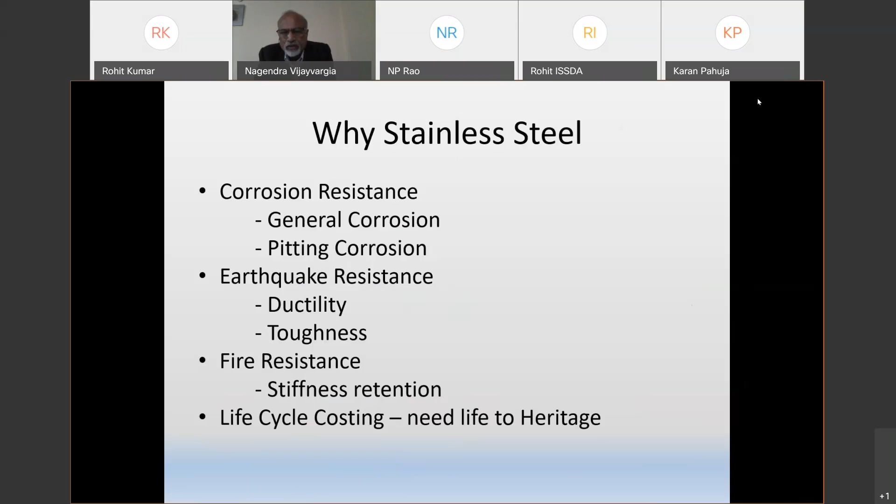The next property is earthquake resistance, because it has got very good ductility and very good toughness. Stainless steel has both ductility and toughness together. Then fire resistance: stainless steel retains its stiffness at much higher temperature compared to other materials. And of course, Rohit has covered life cycle costing, where, if you want to preserve heritage for a long time, you definitely need a good life of the material without maintenance.

I would just like to cover only 2-3 grades which are important for this. There are 3 grades which are important: 304, 316, and 2205. 304 and 316 both are called austenitic stainless steel, and 2205 is called duplex stainless steel. You can see the chemical composition in these, but the most important thing is PREN, the pitting resistance equivalent number.

In 304 grade, it is 18. This number is derived by an empirical formula using the chemical composition, how much of each element is present. So 18 is for 304, 23 is for 316, and 34 for 2205. However, if you see the grades, the mechanical properties of 304 and 316 are the same.

Only hardness is a little higher, 95, whereas in 2205 elongation is low, but yield strength and tensile strength are higher. Hardness is much higher compared to this, 32 RC, because it is in another scale.

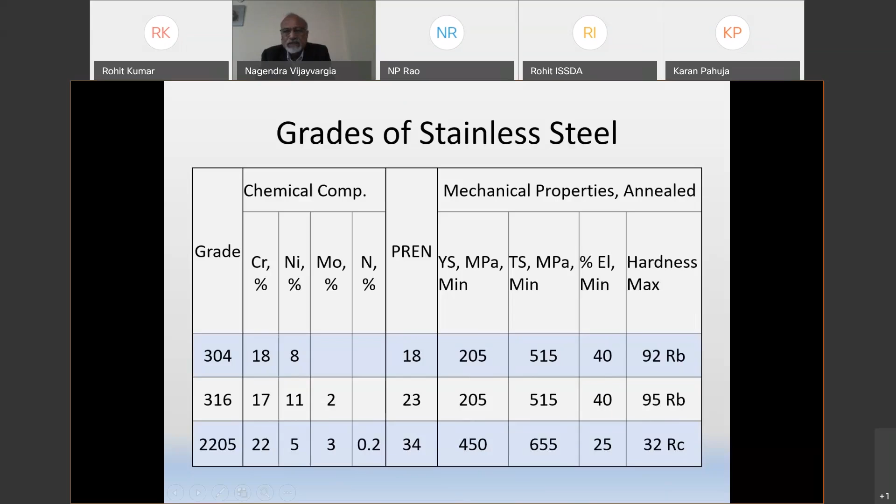Now the areas and parts where stainless steel can be used for restoration of heritage buildings: stone and masonry wall reinforcement, ground and rock anchors, reinforcing cliffs and walls, concrete reinforcement, larger structural sections, poles, wall ties, studs, tubes, rods, clamps, and so many other parts.

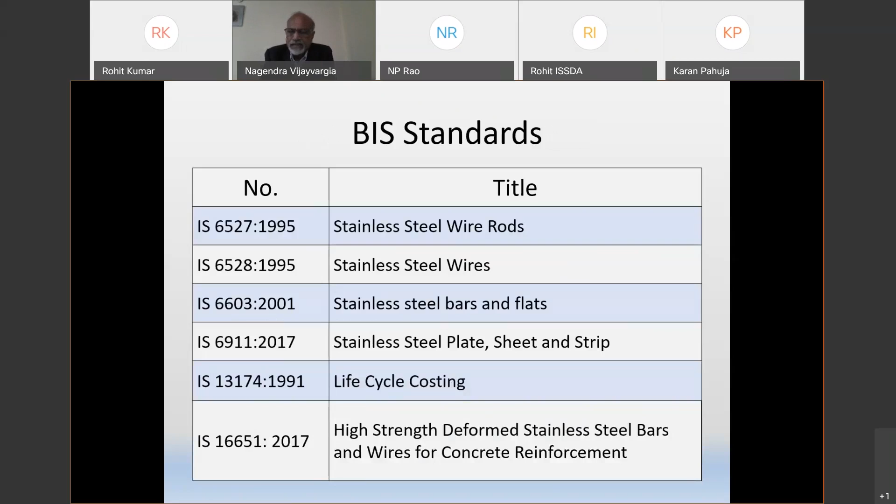There are so many BIS standards available: IS 6527 for wire rods, 6528 for wires, 6603 for bars and flats, 6911 for plate, sheet, and strips, and 16651 for stainless steel rebars. IS 13174 Part 1 and Part 2 is a guideline for life cycle costing. Now let us come to the examples where stainless steel has already been used.

The Shree Jagannath temple in Puri in Odisha state of India. It is only 2 kilometers away from the sea, and it is 66 meters high. No mortar was used during the original construction, and stones were joined with the help of wrought iron U-shaped cramps or dowels. And maximum damage has occurred due to rusting of these cramps.

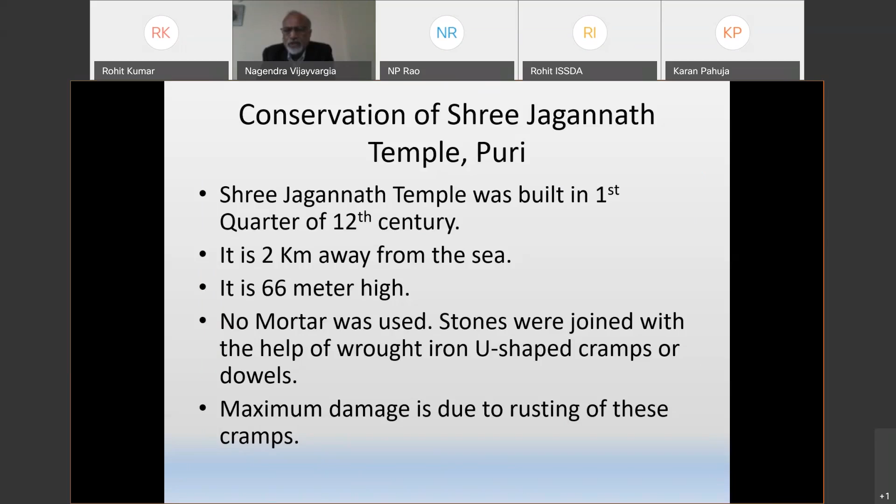How have they conserved it? Of course, I am not a civil engineer, so don't ask me the civil aspect of this, but on the stainless steel aspect, you can definitely ask.

The missing corbels were replaced by polymer modified cement, and these were fixed by stainless steel. And a secondary line of protection was provided by constructing a stainless steel truss to provide strength to the corbelled ceiling system. Corner walls of each floor were done with stainless steel flats.

The southeast portion of the structure was in bad shape. Therefore, each of the damaged stone blocks was removed and new stone blocks were fixed with epoxy mortar and stainless steel. And of course, the Amalaka projections were reinforced with stainless steel rods.

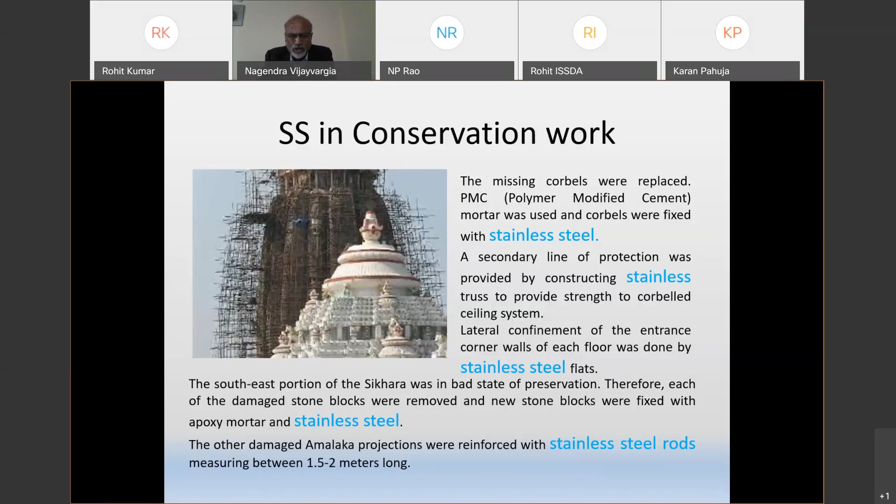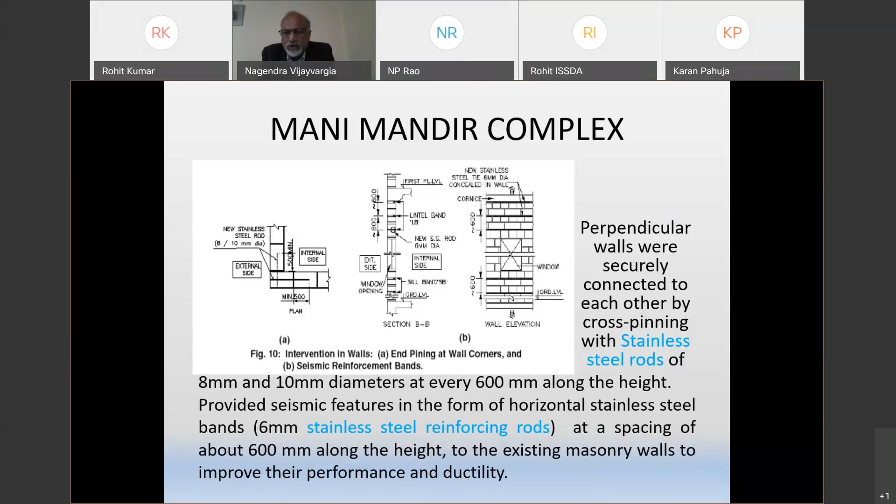Another example in India is the Mani Mandir complex at Morbi, Gujarat. It is a complex of 100 meter by 100 meter plan. In 2001, during the earthquake, it got damaged. Perpendicular walls were securely connected to each other by cross pinning with stainless steel rods. And seismic features were provided by 6 mm stainless steel reinforcement rods at certain spacings.

Where there is movement of support and the arches are internal, a stainless steel tie with turnbuckle is used. In areas where there is no discernible movement of supports, the keystone is tied back into the wall above by means of stainless steel rods. The lintel is formed by providing stainless steel reinforcing bars in the courses between the stone above the arches. Another example, they have used stainless steel dowels for these walls.

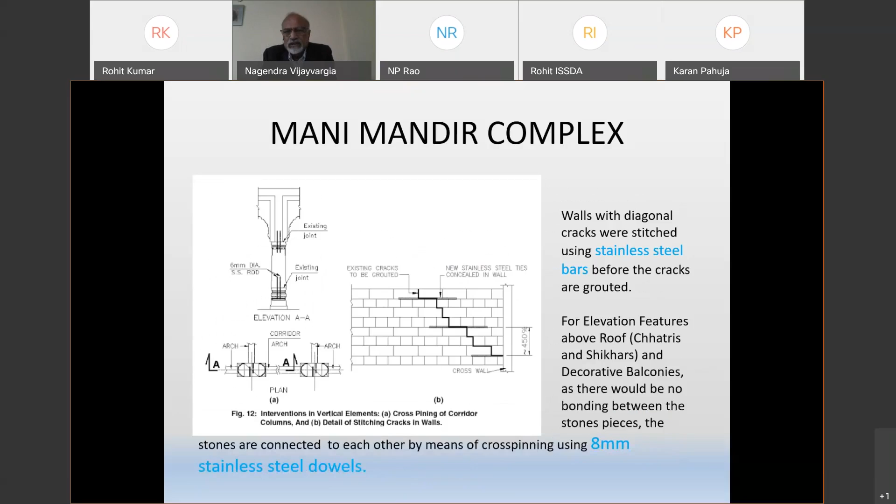A very important example is how stainless steel has been used for restoring the Statue of Liberty. It was installed in 1886, and after 100 years, in 1986, restoration was done. Of course, the original designers, Mr. Bartholdi and Eiffel, anticipated the problem, so they tried to isolate it electrically with impregnated asbestos pads and paint on the iron.

But unfortunately, the envelope design and subsequent modifications to it allowed rain containing coastal salt and acid from pollution to seep behind the copper. So stainless steel type 316 was chosen to replace the entire iron armature, supported by duplex stainless steel 2205, and for the secondary framework 316 stainless steel was used.

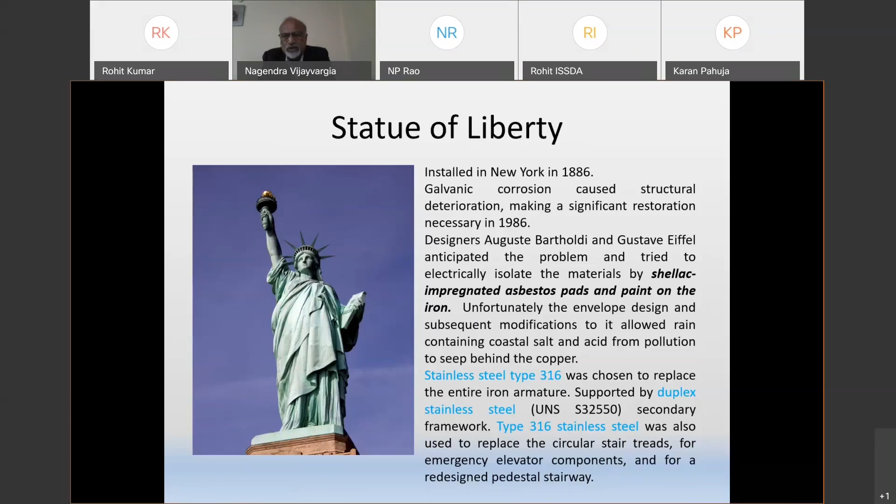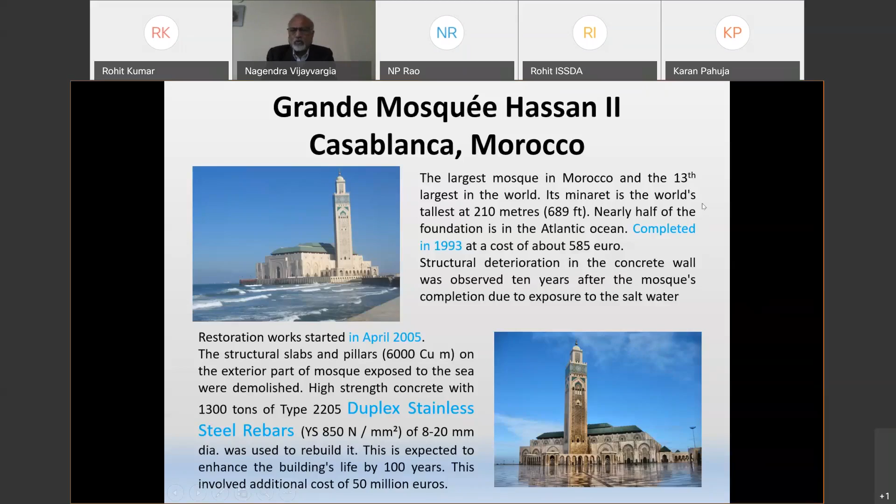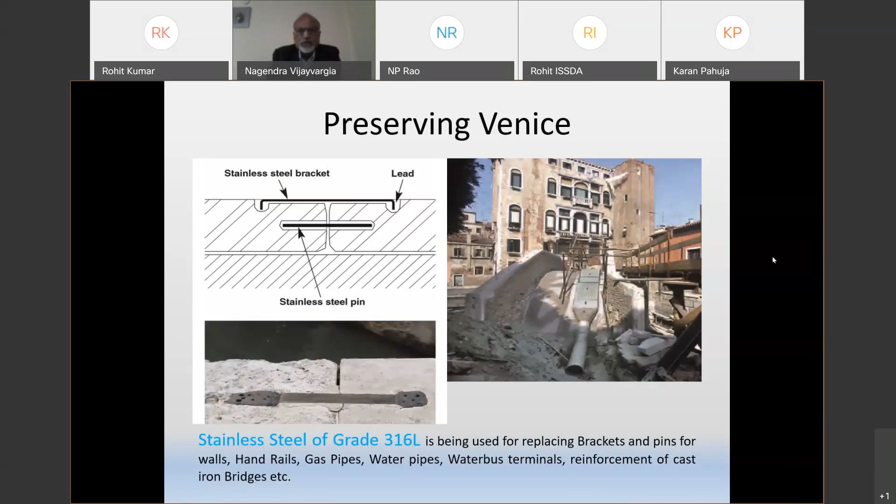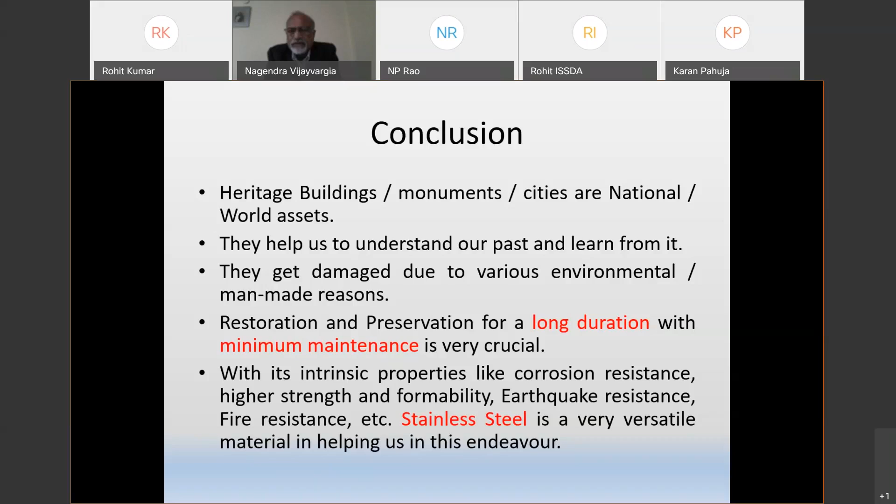Finally, coming to the conclusion: heritage buildings and monuments are very important assets for the world. They help us to understand our past and learn from it. They get damaged due to various environmental and man-made reasons. Restoration and preservation for a long duration with minimum maintenance is very crucial. With its intrinsic properties like corrosion resistance, higher strength, formability, earthquake resistance, fire resistance, etc., stainless steel is a very versatile material in helping us in this endeavor.